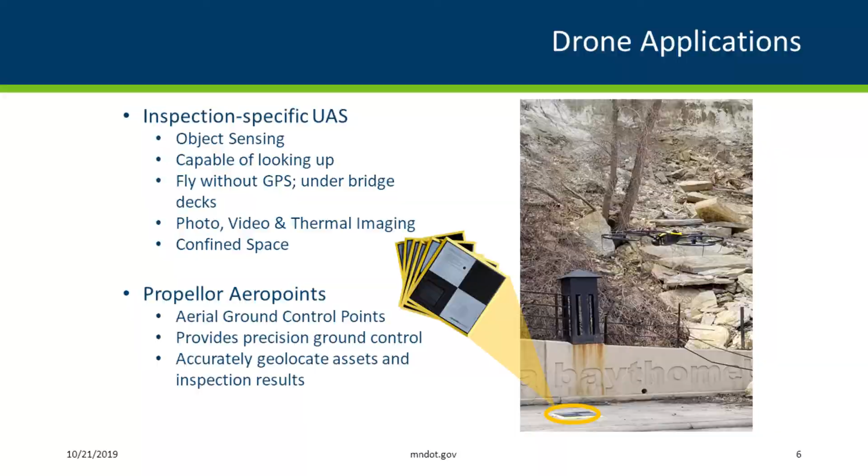We need drones that can provide good photo resolution, video, thermal imaging, and also some drones that can be utilized in confined spaces. We can also use AeroPoint ground control to obtain even more accurate data, survey quality data for 3D modeling. The next few slides will show just some of the examples of drone data presented in some different formats. This is a screenshot from Pix4D, which is a post-processing software that we've utilized within this project.

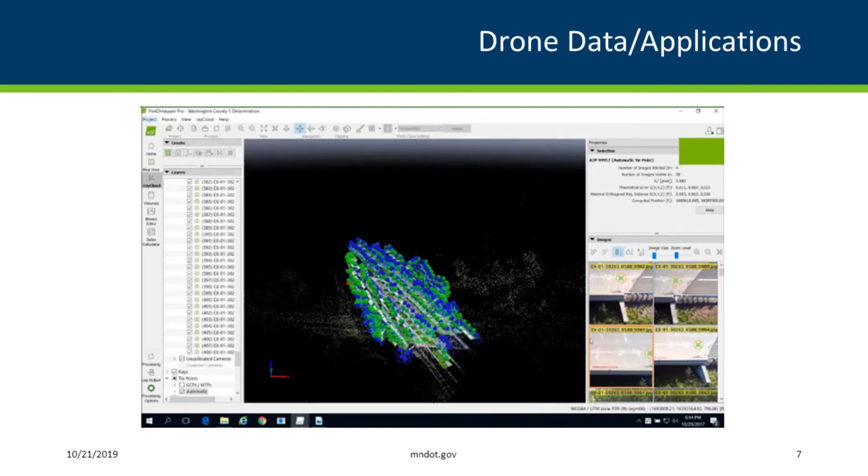And on the left side of the screen, you can see all the points within the map representing all the photos that were taken with the drone. And then the photos you can see on the right-hand side of the screen. Each time you can pick within that map, and then your photos will show on that right side. And within those photos, we can add annotation. We can utilize this data then to even create a 3D map. And within that map, you can take measurements, you can annotate, you can write notes, and it can better represent what the deficiencies are on your bridge.

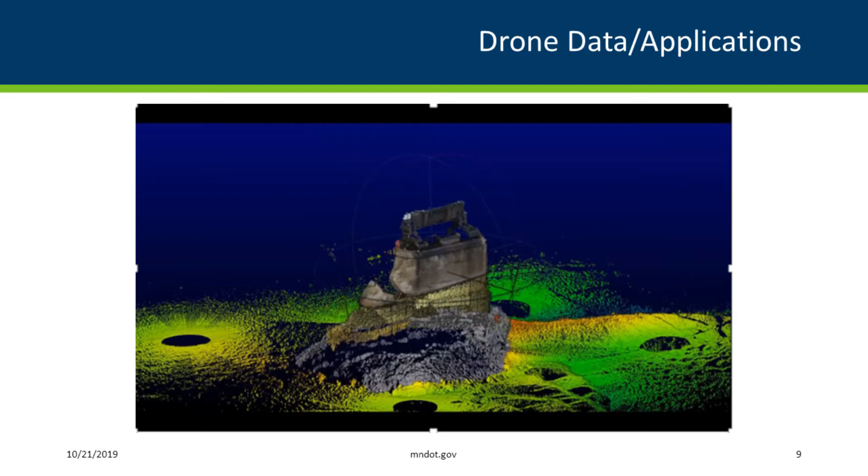We can also combine drone data with other technology. So this is an example of an underwater BlueView scan that was combined with drone data from above the waterline to represent the pier. We can also use drones for management of other assets like roadway signs, overhead signs, and monuments. It can also be used in emergency situations. In this case, this was a rock slide in Wabasha.

Specifically for this project, the funding comes from 3 different sources. $100,000 was the federal STIC grant, $25,000 state match that came from our scientific equipment budget, and $100,000 of research money. And that research money is specific for phase 4, which is implementing in our Metro District.

But the STIC grant will help us implement even broader than our metro district, to statewide application. Some of the tasks within this implementation project include creating a DISC, a drone inspection subcommittee. Members on the committee are within our bridge office, our districts, aeronautics office, FHWA, consultants, and local agencies interested

in utilizing drone inspections. As part of that, one of the deliverables will be an operations manual, and that manual will include pre-planning, preparation, on-site procedures, pre-flight checklists, emergency procedures, accident reporting, and all the laws and policies surrounding utilizing drones. We also want to come up with a drone bridge list and appropriate inspection frequencies.

So it might be similar to bridges you assign an underwater inspection to, or bridges where you have to assign snooper access, right? So we want to identify those bridges within the inventory for MnDOT bridges and local agency bridges within Minnesota where drone inspection might be a good option for access. But it will also be dependent on access issues. It could also be dependent on condition. So we're going to develop that criteria.

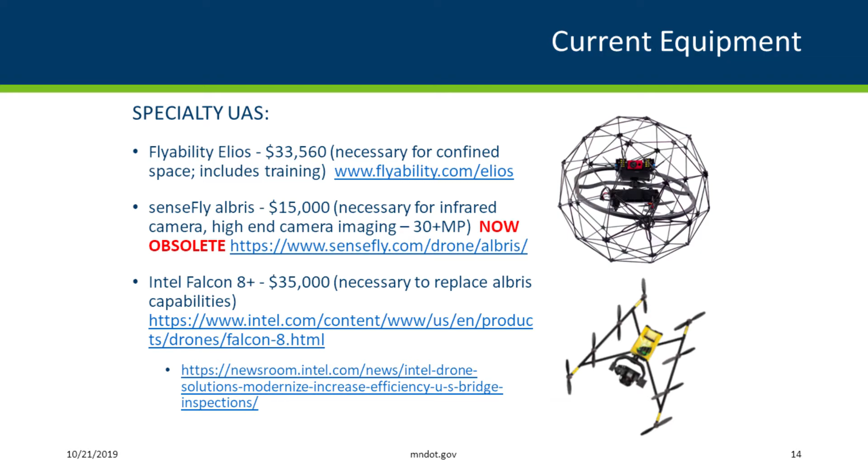These are your commercial level drones, so a little bit higher priced, your $15,000 to $35,000 drones. Benefits are larger sensor size, higher resolution cameras, more reliable, they have dual batteries, durable, and they're specifically built for bridge inspection. So like we talked about, they can look up underneath.

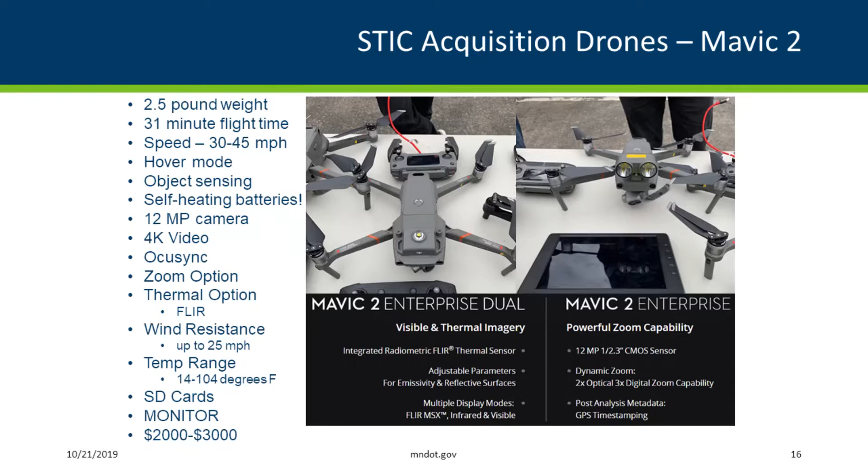One drone that we are looking at purchasing as part of this project is the DJI Matrice, and that one also is built for bridge inspection. It can look up, and we're looking at utilizing that, managed through our bridge office and utilized for 3D modeling. We're also looking at some consumer level drones. These are lower cost options, more effective for our districts to manage for routine inspections.

These types of drones can't fully look up, but they can look up at an angle of about 30 degrees. And so if you angle it correctly, then you can look at the underdeck. Like I mentioned, they're lower cost, but they're smaller size. They can be transported easily, right? More readily used by our district staff. And they can still provide really high quality imaging. And you can put thermal cameras on these as well.

It's not just the drones, you need all the accessories too, right? So this is a CrystalSky monitor for the controllers. It's ultra bright, it can work in extreme temperatures, and it's interchangeable between all the drones. Like I mentioned before, on some of the consumer level drones, this is the DJI Mavic, and then I mentioned the Matrice. We're looking at DJI at this point because it's the same manufacturer. This type of monitor is interchangeable on those drones. We also can interchange the batteries and some of the other components. So that's why we're looking at utilizing the same manufacturer.

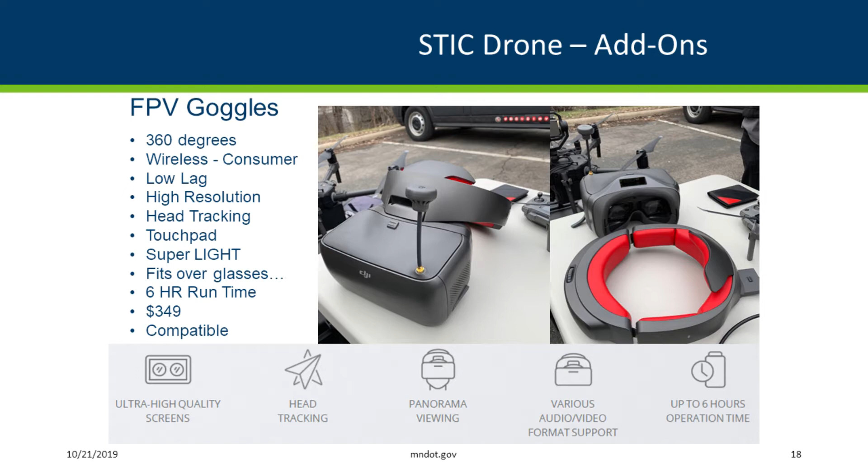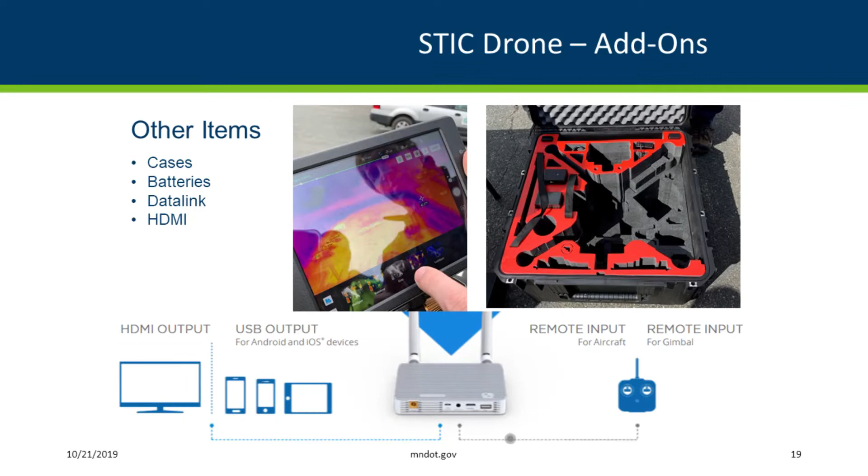First-person view goggles. These put you in first person like you are on the drone. You're viewing what the drone is seeing. They fit over glasses, they're very light to wear, and they have head tracking. So you move your head, you can turn the drone. But if you're utilizing these, you have to have someone else in line of sight of the drone at all times. Other things you might need to think about: cases, batteries, data links, HDMI cables.

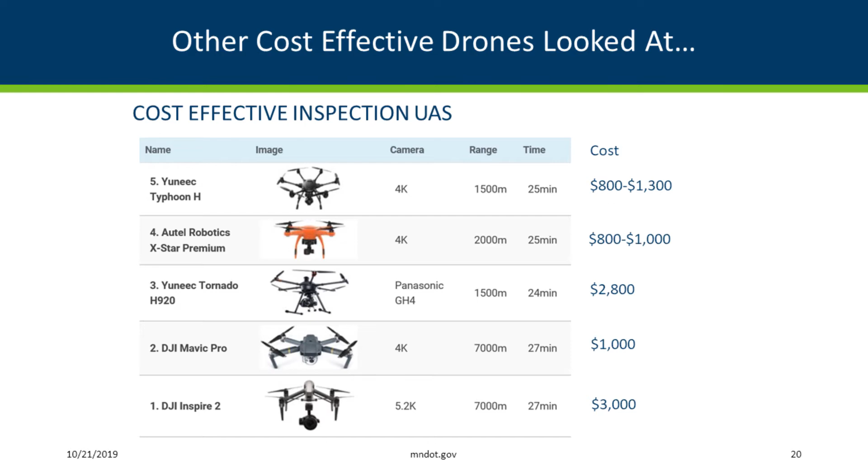Here are some other cost-effective drones that we looked at as part of this project, but like I mentioned earlier, we're looking at purchasing the DJI models.

Even more to think about, right? Not just the drones and their accessories, but how are you going to store the data? How are you going to process the data? You need supercomputers, post-processing software.

Then there's licensing, registration, insurance, right? Every drone needs to be flown by a commercial pilot. You need FAA registration, we have MnDOT registration, insurance. Again, it's a fleet, right? It's a fleet of equipment, so we need to treat it as such. And then you have extra batteries, external hard drives, power cords, communication devices, right? A lot to think of.

Timeline for the project, so we're right in that field work and field training development stage. The next phase will be finalizing the operation manual. And then the report, as I mentioned, is due in June of 2020.

I mentioned this earlier, the goal is to develop a bridge drone list for Minnesota bridges. We're starting with our access policy. So there are times when the typical means of access is not enough to satisfy NBIS for routine inspections. You may need additional access to actually completely define what that condition is or if there's any change in that condition. Traditionally, we've looked at getting a ladder out, getting an underbridge inspection vehicle. You may have to go to rope access.

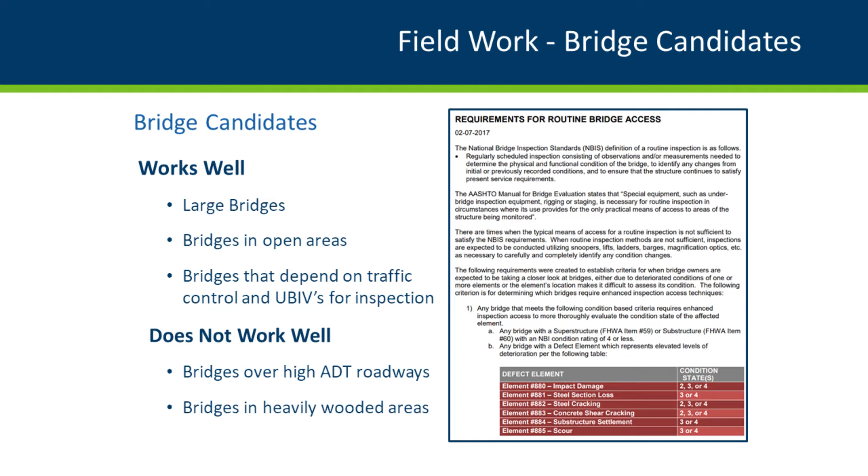Part of Metro's implementation, we selected bridges within the metro area, and we tried different drones on different types of structures and kind of tried to figure out what works best. For example, in cases of tight access, like beam ends and bearings on high wall abutments, you may need a certain type of drone, like a confined access drone like the Elios, which we see a lot in our metro area, which is why our metro district purchased the Elios.

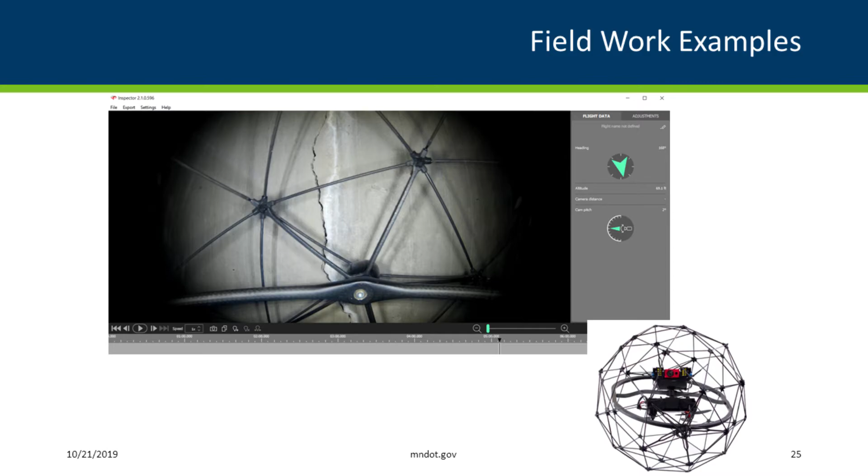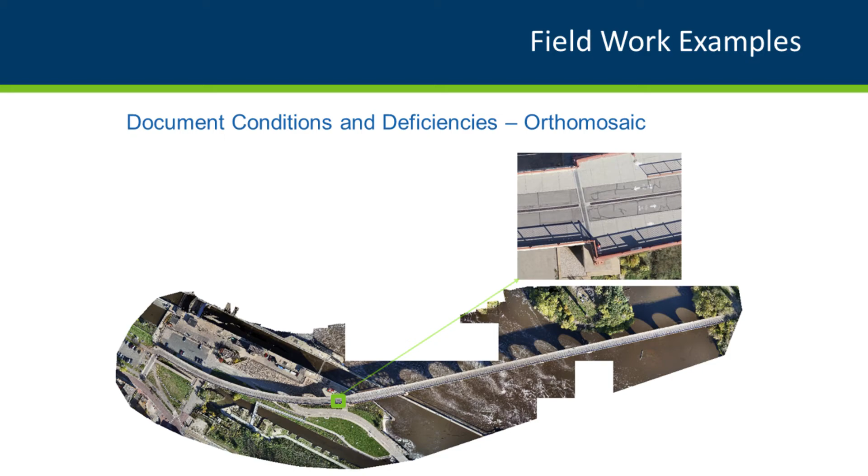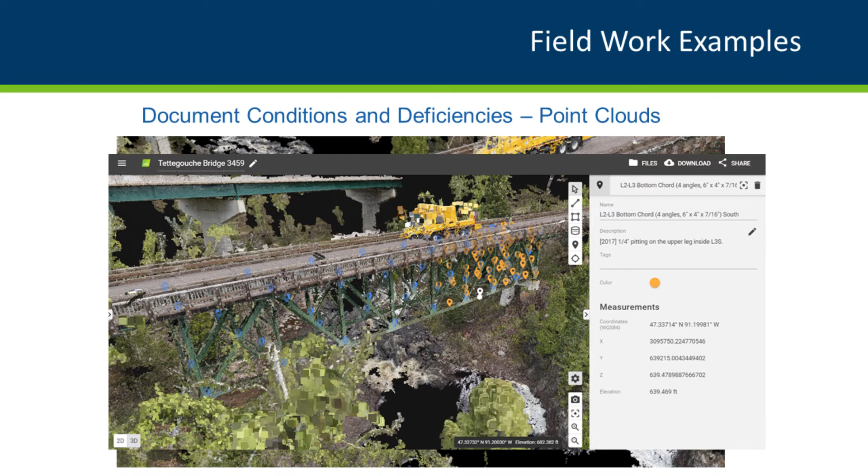For your larger, more complex structures, then we might look at different reporting tools, right? So maybe you can do some autonomous flying with larger drones like the Falcon 8 or the Matrice, and then you can provide an orthomosaic map, or photo, which is basically just an aerial photo that's been geometrically corrected so the scale is uniform so that you can take true measurements on it. Or you can use it to develop point clouds. And within those point clouds, then the deficiencies can be documented, so you can kind of see all the little tags, the deficiency tags. It's very important to be able to communicate your data quickly and efficiently and also spatially.

We talked about the cost savings. There's also reduced public impact, right? We talked about not closing the lane. And it can assist with those data-driven decisions, especially when you get to your more complex structures, or maybe they're at a level of condition where you need some sort of a management plan. So you might need more data to appropriately manage that throughout its life.

Some more of the challenges, it's a learning curve, a lot of training. Also, we have to have some acceptance. It's not a hands-on inspection, right? And it won't replace your hands-on inspection.

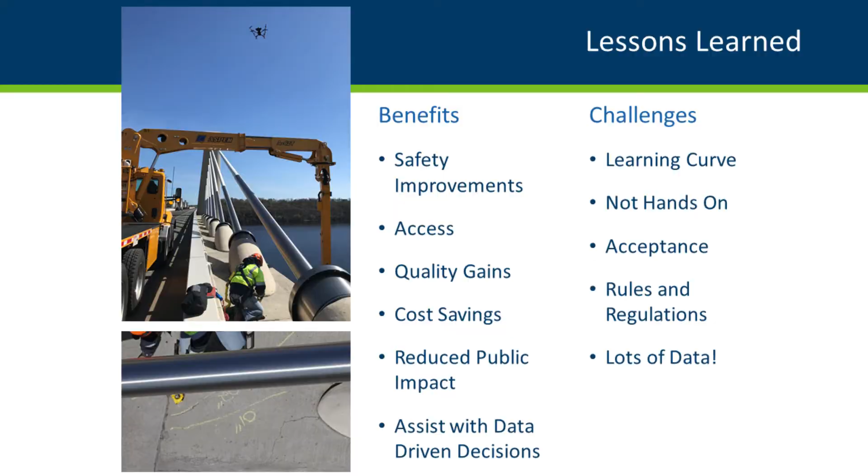It is an opportunity to get into access in areas that you can't see traditionally with binoculars, or it's harder to access with a snooper. You can get a good idea of what that condition is and where you need to focus your efforts. There's a lot of rules and regulations and a lot of data, so figuring out how to store that and present it in a way and use it on bridges that makes sense, right? Those are the keys.

Some next steps, as I mentioned: we're developing the UAS operation manual as part of this project. We'll purchase equipment, perform statewide training, which is already underway. We have some of our districts now that are licensed pilots. We'll develop the drone inspection list criteria, or at least finalize that, and then publish the final report in June. So more to come. Thank you.

Any easy questions? How much more office time do you see reviewing video? I can't answer that because I haven't been the one reviewing the information, but it is definitely more intensive to review it. We have not, like I said, we're looking at implementing it on a statewide level and determining which bridges it makes the most sense to do a drone inspection on, because you do get so much more data, right? So it makes more sense on some of our complex bridges where we're trying to develop a management plan, or a repair plan, that's a little more intense than maybe what your regular repair plan might be.

Is your report going to have some study on whether you want to do it in-house or by consultant? Do you have the study, or did you decide to go in-house right away? The research project started as a partnership, like I mentioned, with Collins Engineers. So most of our drone inspection to date has been through consultants. I think depending on what type of drone you need and what type of data you want out of the inspection, that may determine if you perform it in-house or if you go out with a consultant. Or, for example, if you use a consultant for determining the management plan, maybe that's part of that same contract.